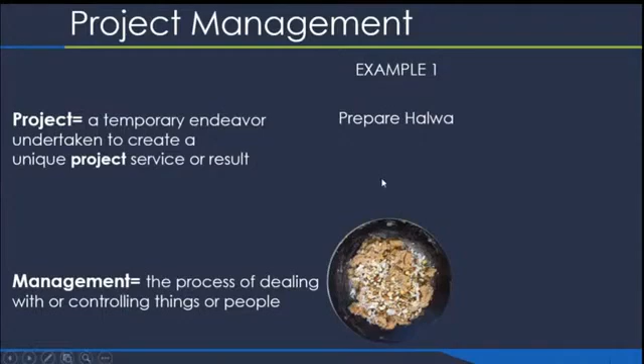Abraham Lincoln once said that if you give me 6 hours to chop down a tree, I will spend the first 4 sharpening the axe. Today's presentation is more about that. Before we jump into construction management proper, we should look at what project management is. All of us are to some extent familiar with the definition of a project - it's a temporary endeavor. Management is the process of controlling the results, so the expectations should be the same. Project management ranges from software development to construction industry and many other industries. Whether you are preparing a sweet dish for the first time or constructing the world's tallest tower, you're using the same principles.

Sorry to interrupt, Abhishek. Your top part is getting cut. I'll do one thing. Maybe some screen adjustment or something. A bit lower. This could be good. This could be all good. Right, sure, thank you. Not a problem, sir.

So, when we speak about planning, it's basically finding out if we have the required resources and the methodologies in place, and then execution is where we actually start to dwell deeper, and there is quantitative work which is done. Then, to ensure that the execution is as per requirement and the end goals are met, there is monitoring and control, and at the end there is closing and handover.

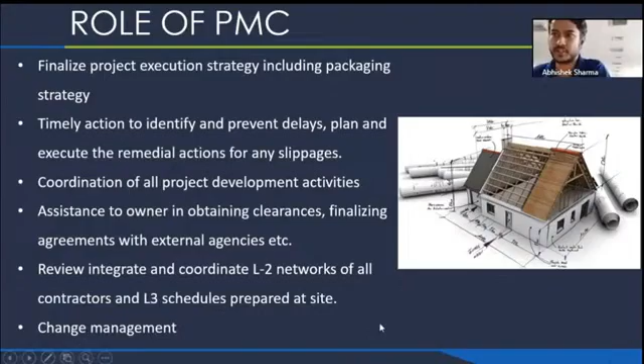Now, coming from the consultant's background, I'll briefly mention what is the role of a project management consultant in any construction project. Some key points I would like to highlight are coordination of all project development activities, finalizing the project execution strategy, and change management. So basically, irrespective of all the stakeholders, in the simplest terms, the project management consultant's responsibility is to make sure that all the deliverables are in place as required by the client, or whatever the end goals of the project are.

So before you go forward towards construction, these are the steps required: proper site selection is to be done, then the environmental impact assessment is done, and apart from that, the pre-feasibility and feasibility studies are done. In engineering particularly, you go to detail and basic engineering estimations for bidding. And speaking of bidding, in procurement, you do the tender documentation, pre-qualification of the bidders, and bid management.

Now, going forward, this is the crux of the webinar which I want to emphasize the most. The digital solutions for the pre-construction stage are very important, because at this point of time you have the opportunity of leveraging the old information you already have. By you, I mean if your company has done 10 to 20 projects, it's important that you grow along the learning curve - there should not be a step back. You should not tackle each project as unique, because there must be some information you've already captured about similar projects in the past.

So here, what you can see in the circle is, whenever we speak of BIM or building information modeling, people often confuse it with the abbreviation - they confuse it with an actual building or a multi-story building, if I may.

But how I understand it is, building is more like a verb. It's the verb - the process of a construction project or any other project coming into picture. That is where building information modeling is required.

So what do we do during planning stage? During planning stage, we take certain steps and identify and standardize the terms that we are going to use. We standardize the benchmarks or the metrics that we are going to use. So in simplest terms, if there is a column, what are the dimensions of a column which are expected? Then what will the column be constructed with?

Just a second, sorry.

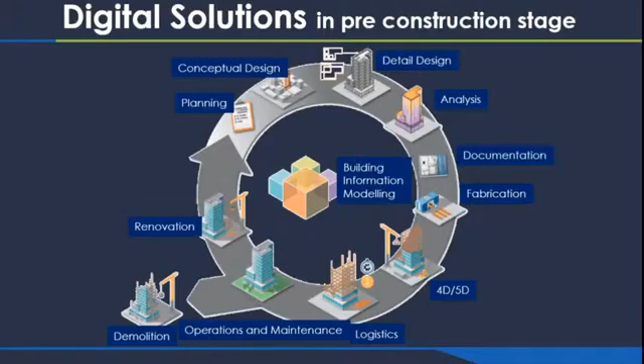Most importantly, once a project is completed - by completed I mean once the building is erected and handed over to the client and people start using it - that is not the end of building information modeling. Because at that point, the facilities managers and other stakeholders come into the picture, and it's in their interest to know how the building functions, how electrical systems are working, how the intelligent building management system is working, and so on.

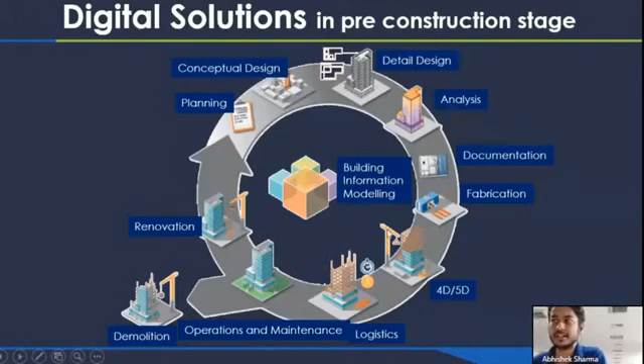Throughout the life cycle of the utilization of that building, the information collected in the initial phases - the pre-construction and construction stages - is also used. After that, there are two options: either the building can be renovated or demolished. In either case, this building information model tags along and helps all the stakeholders.

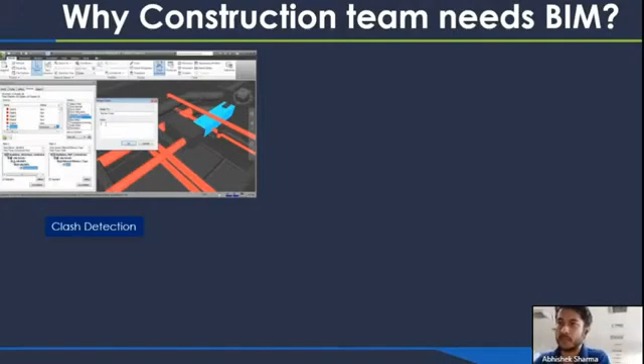Apart from physical clash detection, it's also important to get a live flavor or taste of how you will experience that building. User experience is another field in digitalization that people are using. They're using virtual reality, augmented reality, and to some extent mixed reality to show users that they can experience a building even before it's constructed. For that, you need tools like Revit and Navisworks, where you can very easily make a walkthrough.

Basically what happens in a walkthrough is a model of a person's height, approximately 5 to 5.5 feet, is moved around across a predetermined path, and you can see how the critical areas of the project look like.

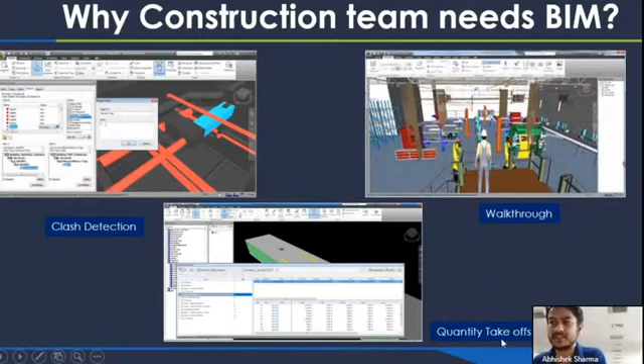Apart from that, there are quantity takeoffs. When we briefly touched upon procurement, if we want to analyze and assess the amount of a particular resource or material and the stage at which it will be required, it's important that we can assess it from one source of truth. What I mean is, if we are using one three-dimensional model, the quantity takeoffs and quantity estimation should also be done directly from there. This is another feature which Navisworks and Revit provide us.

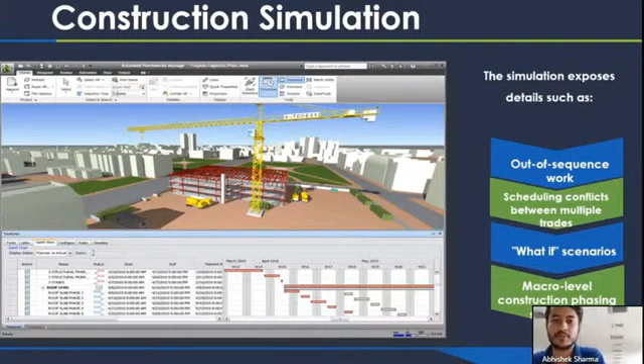Now, this is something very interesting. A lot of people have been speaking about BIM, three-dimensional BIM, 4D BIM - what are those jargons that people throw around? Construction simulation is another strength of Navisworks which you can utilize. The benefit of construction simulation is that you see a three-dimensional model on a timeline - from day zero till the final date, how the construction comes into being, how the building is constructed, and the various aspects of the building as well.

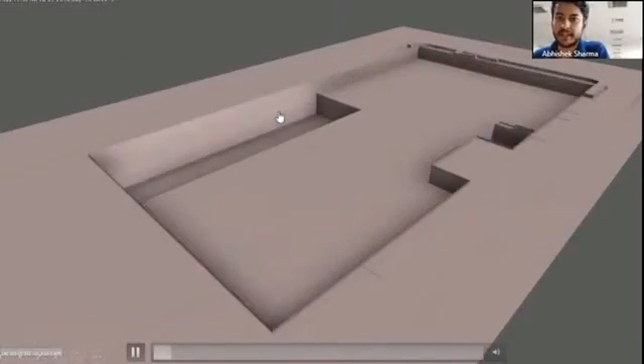This is a project our team worked on, and before construction even started, we had a 4-dimensional model ready. On the bottom left, you can see a timeline shown for the project according to the schedule prepared by the planners. Here you can see how the 3-dimensional model is changing - in green, the work in progress, and in gray or concrete color, the actual work expected to be completed by that date.

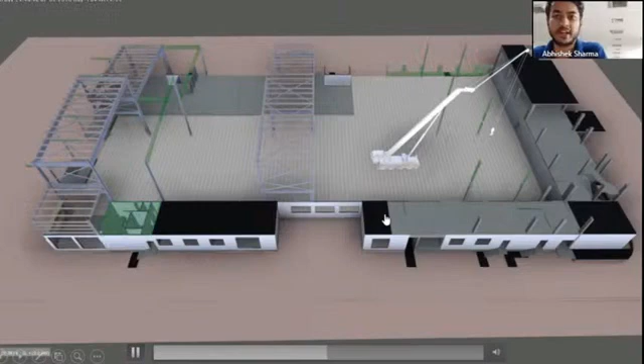You can see here that it's not only restricted to elements of a construction, a building, or a plant itself. You can also model the various plants or equipment which are going to come into that building, and you can see the logistics and how they are going to move. And here you can see when the model is completed.

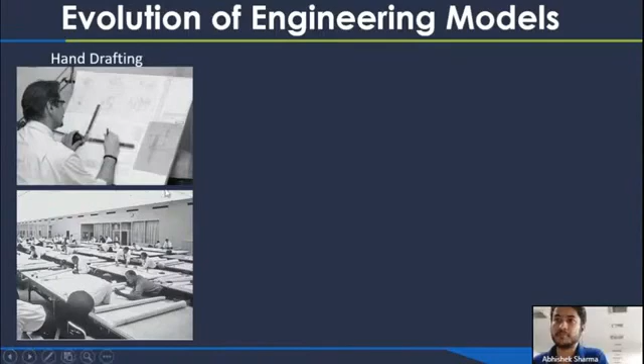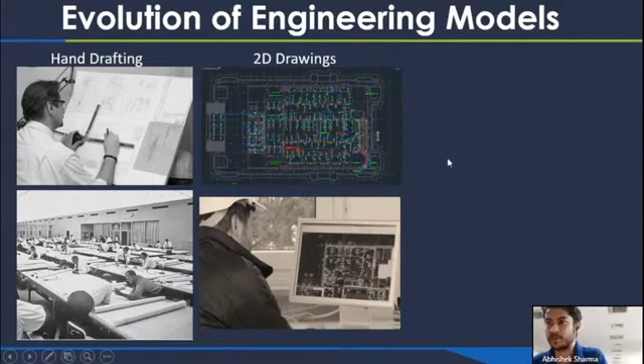Now, evolution of engineering models. Today we are using three-dimensional models and others, but 50 to 60 years back, we started in civil engineering, and gradually we went over to two-dimensional drawings using AutoCAD, which is Autodesk, a very popular tool for that. But today we stand at a precipice where we have 3D models of almost all the projects.

And there is another interesting term which is being used, called a digital twin. Now, what is a digital twin? Just to give an analogy to all the civil or structural engineers who have joined us, and I'm sure they would understand it in much greater detail, you can think of STAAD.Pro and the model you create in it as one of the aspects created in a digital twin.

So what happens in STAAD.Pro is, if a building is supposed to be constructed, before that we create a model and see how that model behaves under different loads. That can be done in terms of the dimensions and elements of the construction model, or what are the actions which are expected.

But extending that to other input processes, like the amount of energy this building is going to use, the amount of water it is going to use - and not just a building, if there is a power plant and you want to see various simulations of how it will behave under different load conditions, that can be done from a digital twin. So we hand over a digital twin to one of our clients and show them the different simulations of how it's performing under different situations.

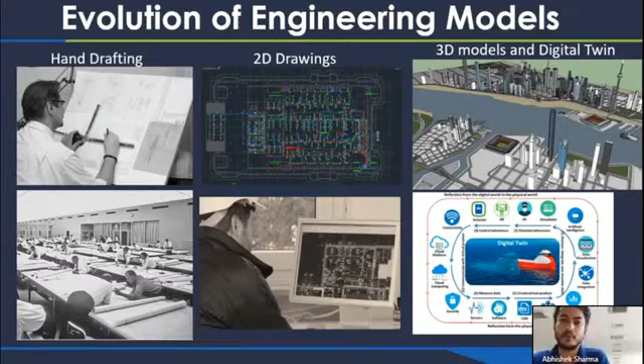Now, unfortunately, the adoption of different technologies in construction has been very slow compared to all the other industries. And if you see, conventional surveying tools are still the norm - theodolites, total stations, and others are being utilized. But there are other alternatives which have come up recently, and we at Tata Consulting Engineers take immense pride that we are utilizing these tools and leveraging these technologies to add value to our clients.

So this, what you see here, is a LiDAR sensor mounted on a drone.

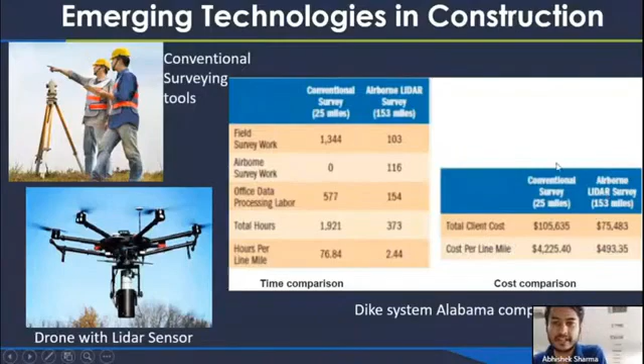So another point people raise is that the return on investment, or the benefits you get, pale in front of the cost. I would like to beg to differ there as well. Here is a small presentation - at the bottom you can see a surveying job that was done, and this report was published by Dike System Alabama company. You can see the hours per line mile in the conventional survey versus airborne LiDAR survey show a huge difference, approximately 98% if I'm not wrong. And in terms of cost per mile, the drone and LiDAR system can reduce or save up to 90% of your costs.

And this is an example of how we are monitoring our construction sites here in Pune also using drone technology. Drones and cameras are being utilized to capture the progress at different stages of a construction project, and these are officially being submitted to the clients as part of the progress reports.

Apart from that, I'd like to mention another point about critical power plants. One of the chemical plants - I had the opportunity of going there - they wanted a turnaround, meaning one of their facilities, one of their pipelines, had to be shut down for a particular period so they could carry out operations and maintenance, and they wanted to reduce this time. A key challenge at that point was that this particular pipeline or plant did not have any 3D models, because it was so old that at that time these technologies were not prevalent.

So as a solution, we provided LiDAR services to them. Now, LiDAR basically means light detection and ranging scanners, which we just saw the benefits of when attached to a drone. LiDAR scanners can help create - I would not say 100% accuracy, but at least highly accurate models - just by scanning. This immensely saves cost as well as time for both the consultants and the clients.

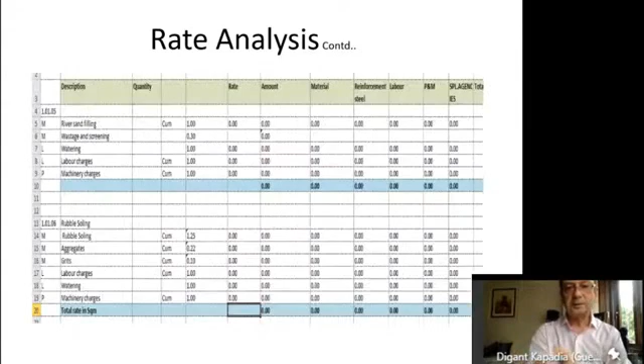Next one please. These are some of the examples of the rate analysis - we can just skip through that. These are all analysis, some of the things which I am trying to show you.

Now, the enclosures - when you really submit a particular bid, once you have done all your information collection, all your rate analysis, your pricing, your programs, etc., there has to be a bunch prepared for submission because that's going to be the key. Your bid acceptance or rejection is going to depend on the type of submission that you do, not just the pricing part of it. Maybe in a government tender it's just the pricing, but there also these are very important now, unlike the olden days where price was the only thing. There are lots of marks given for each of the items - dozens of them are there.

Some of the typical things I am showing - you may think, why sir, you have been burdened with this. What I'm trying to say is that engineering roles are tremendous, much more than what you may feel. It is not just like doing concrete or steel or something from a construction angle - there are so many things one engineer has to play a role in. In those sections and situations, the engineer has to play the role at times of an accountant, at times an admin clerk, at times HR - everything is a common role. So that is why many of you may feel a lot of times in engineering there are subjects which are unrelated to engineering. Why? Because the engineer has to have a holistic view of the whole thing.

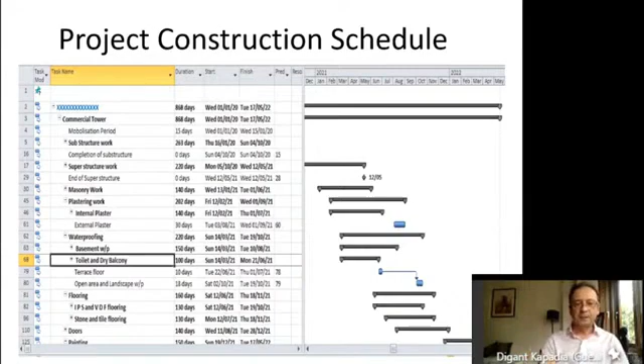Thank you. At least I had to rush through the slides, but all the same, I think some other time when we go into a better field, we will manage to see that the slides and other things are well controlled. Thank you, Umar. First of all, I am sorry about all this goof up that happened about the technology, but fortunately we could come back and you could at least give us some glimpses of what you actually wanted to say.

To sum up what I understood from your presentation, first and foremost, what you said, that the action lies in the construction. That's exactly what it is, because whatever the consulting engineer or the project management consultant does, he actually defines the project. He draws up the contractual agreement or maybe tender documents, everything, bills of quantities. But it's the contractor who's actually going to execute the project. In that sense, what you said is exactly true, that the action lies on the construction side. In fact, if I may put it so, the game of construction is actually played on the site and not in an office.

Now, one more thing which I would like to add from my side is the contractor who is squarely responsible for completing the project in time, completing the project in the given cost, and with the desired quality. So in that sense, there is a lot of responsibility that the contractor has to have on top of his head in terms of the deliverables which he is supposed to give to the client.